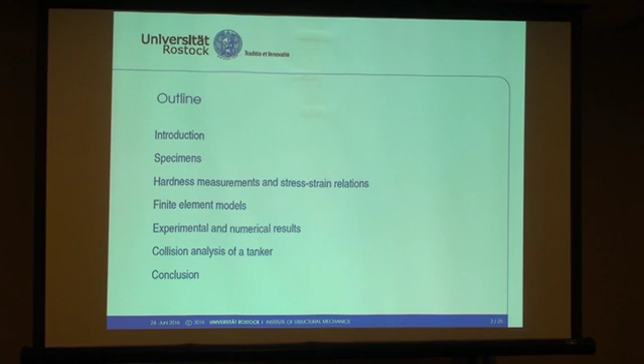Because such accidents happen over and over again in frequently used waterways, it is necessary to ensure the structural integrity of the damaged ship, and one way to do that is with an alternative stiffening system to increase the energy absorbing capability of the double hull structure.

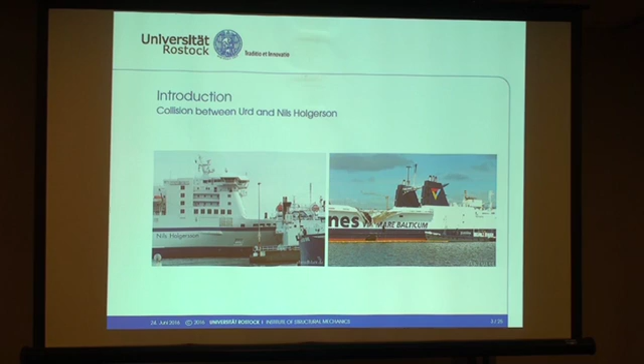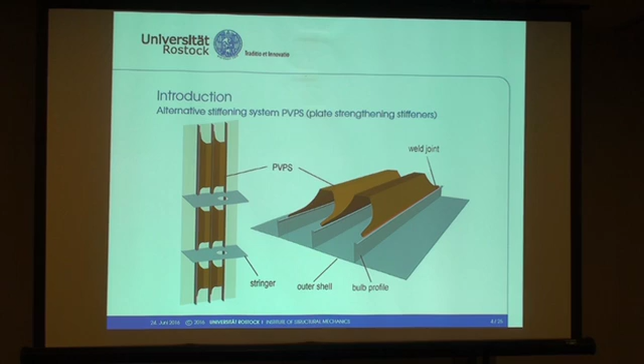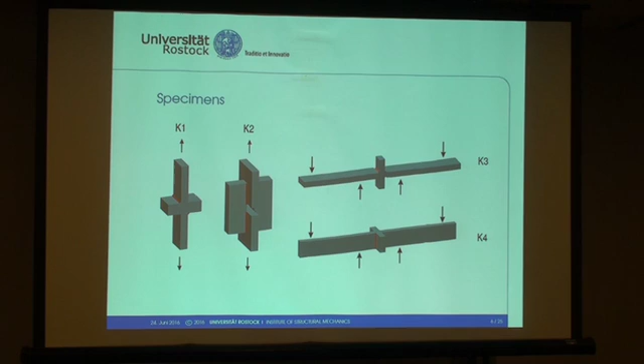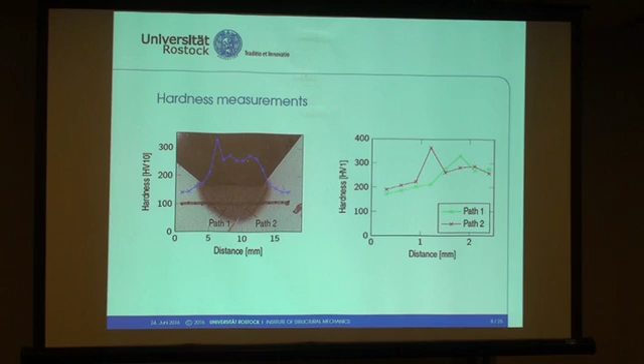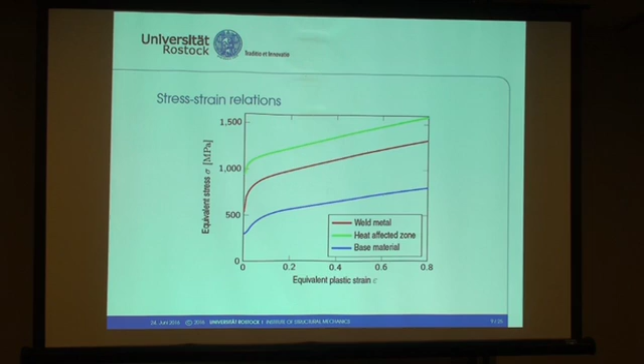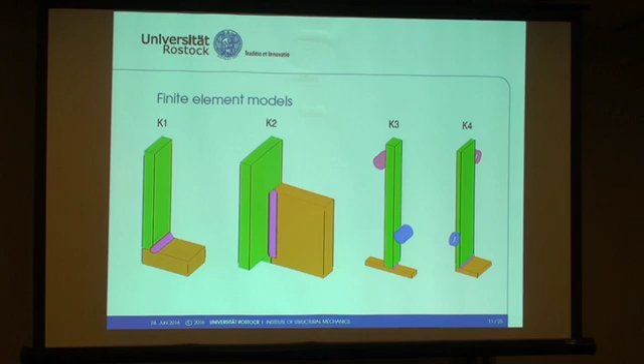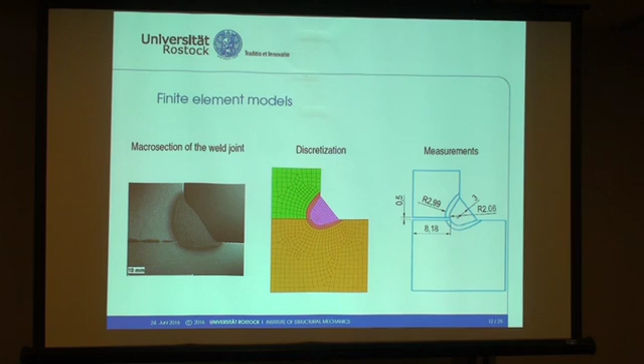Also, a failure criterion is used to reproduce the fracture or failure in the weld joint. I used the Rice and Tracey criterion. It's a function of the plastic strain, depending on the stress triaxiality, which is calculated from the hydrostatic stress state and von Mises equivalent stress. And you can see here the curve of the failure criterion.

It's calibrated by the value epsilon critical. This is the failure strain at T equal 1/3, uniaxial tension, and it is implemented in finite element software by a damage integral.

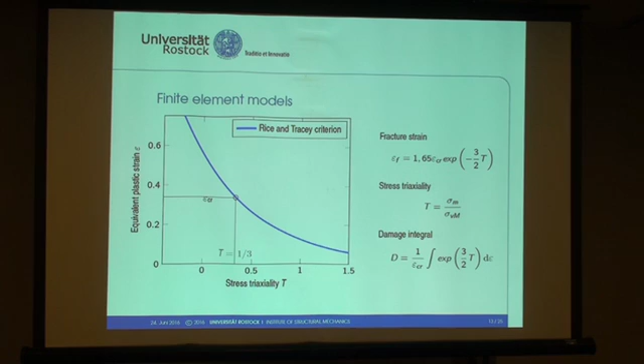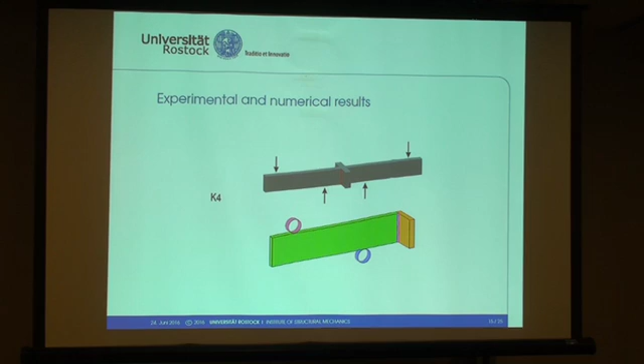Now I want to compare some experimental and numerical results, and I'm going to show you results from K4 under 4 point bending under a constant moment. You can see in red, green, and blue the force displacement curves of the experiment, and in black the finite element analysis using the Rice and Tracey failure criterion.

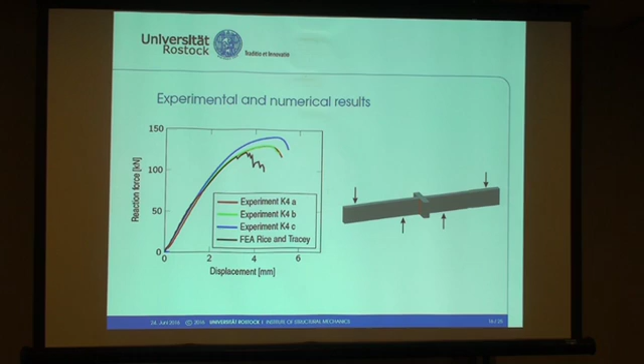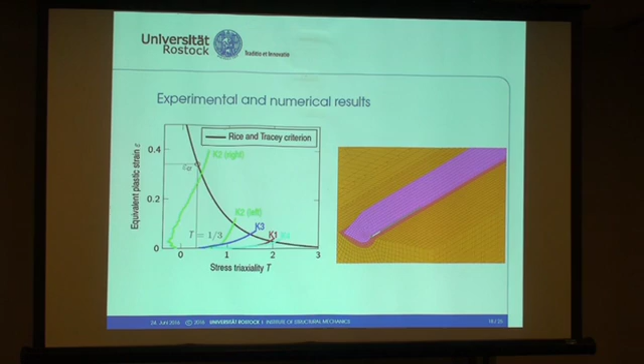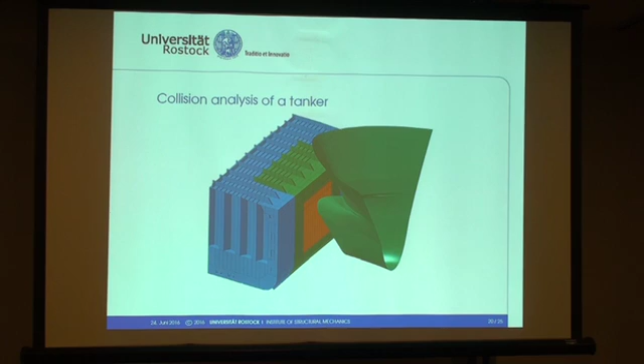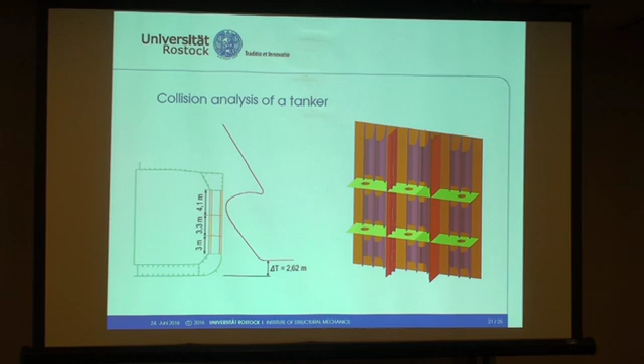And the striking ship, that is a rigid body which is penetrating the double hull structure. Here that is the cross-section of the finite element model I just showed, and here the orange area, you can see the inside of the outer shell, the frames and the stringer decks in green, and also the bulb profiles and the PVPS on top of them.

To investigate the load capacity of the weld joint between bulb profile and PVPS, I discretized that area with solid elements relatively fine. You can see here the solid elements of the PVPS, the weld joint, and the bulb profiles, and I applied the calibrated Rice and Tracey failure criterion to these weld joints.

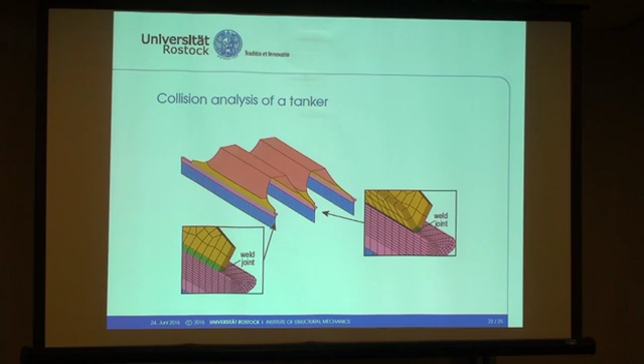I just want to exemplarily show 2 force displacement curves of 2 different collision analyses of the tank ship: one without PVPS, the typical double hull design, and one with PVPS. Integrating these force displacement curves into energy, and from these energy displacement curves, an increase of 20% can be determined, a 20% increase of the double hull structure by the PVPS.

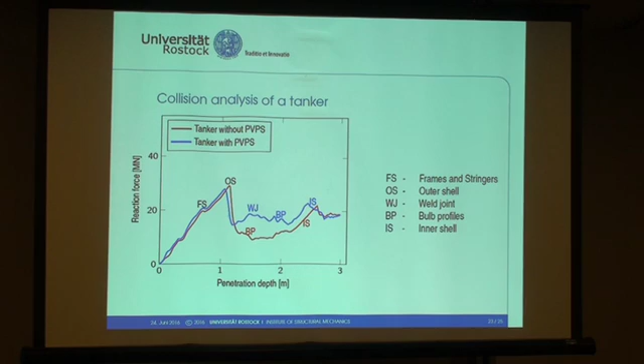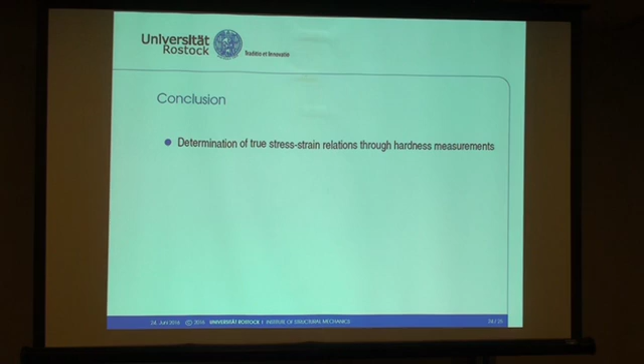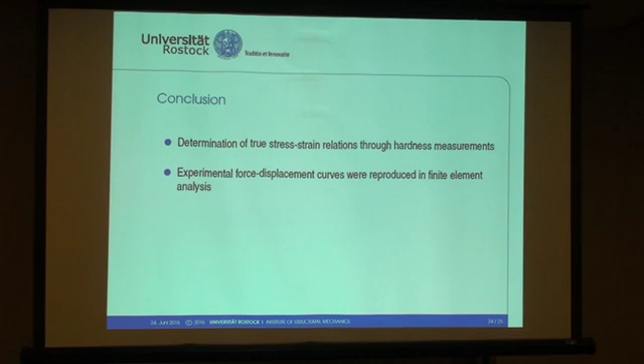And with that, I want to conclude my presentation. First, it was possible to determine true stress-strain relationships from hardness measurements, applying these true stress-strain relationships of the heat affected zone of the weld metal to the finite element model of the cross-strength specimen. It was possible to reproduce the experimental force displacement curves of the cross-strength specimens.

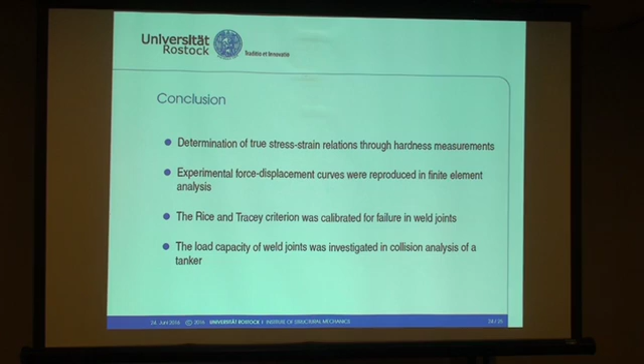Furthermore, it was possible to calibrate the Rice and Tracey failure criterion, and applying the calibrated Rice and Tracey failure criterion to the finite element model of the tank ship, it was possible to investigate the load capacity of the weld joints between PVPS and bulb profile. Thank you for your attention.